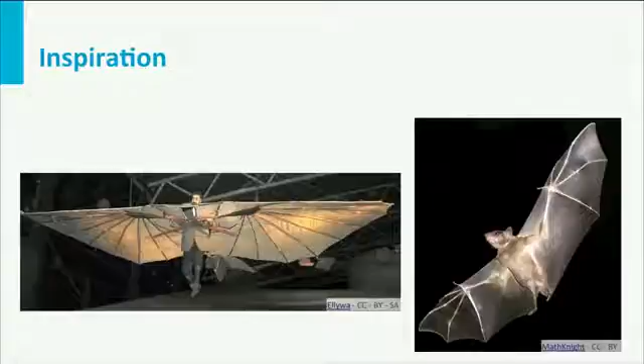In the picture on the left-hand side, you see one of his designs. On the right-hand side, you see a bat, and you can clearly see the resemblance of Lilienthal's design with the wing of the bat.

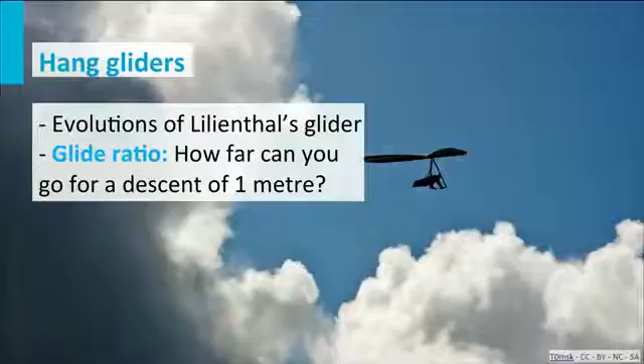Far descendants of Otto Lilienthal's gliders are today's hang gliders. These hang gliders fly from high ground and try to pick up some thermic to stay in the air as long as possible. What is a common glide ratio for a hang glider? Note that the glide ratio is the ratio of the horizontal distance for the descent of 1 meter. For common hang gliders, this might be 17:1, whereas for gliders with fixed wing, this might be 20:1.

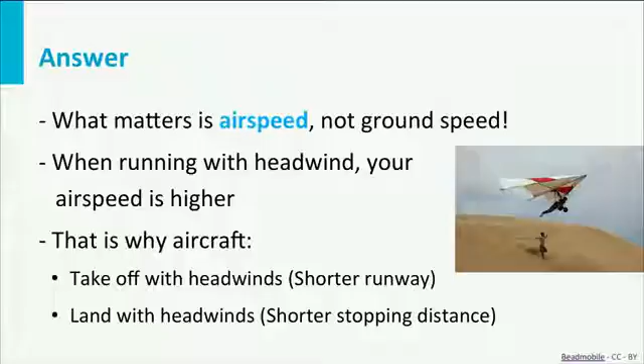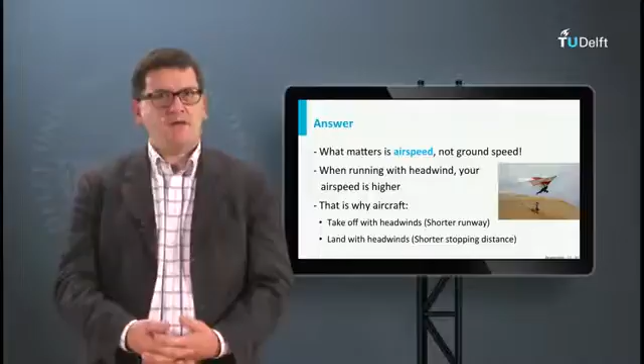Another question: gliders often run down a hill to generate speed. Do you think that the wind direction is of any influence? The answer is yes. What really matters is airspeed. So if we run downhill with a headwind, your airspeed is higher and you can generate more lift. That's also the reason why aircraft preferably take off or land with a headwind. In both cases, the required length of the airstrip is minimal.

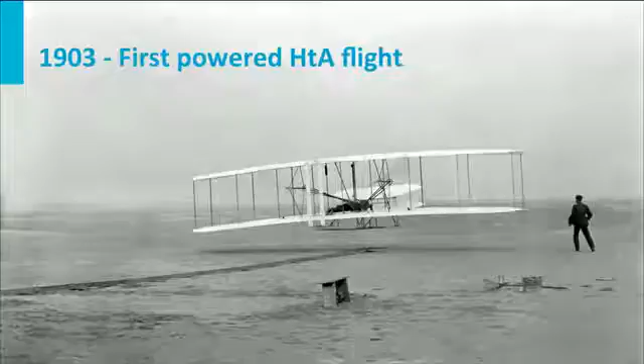Let's return to the pioneers of flight. The Wright brothers were the first people who flew their aircraft named the Flyer, a powered and controllable heavier-than-air vehicle. Although the flight was very short, the principle of flight was proven. In this short video, taken a few years later, an improved Wright Flyer is shown, which flew almost 1 hour with 2 persons on board.

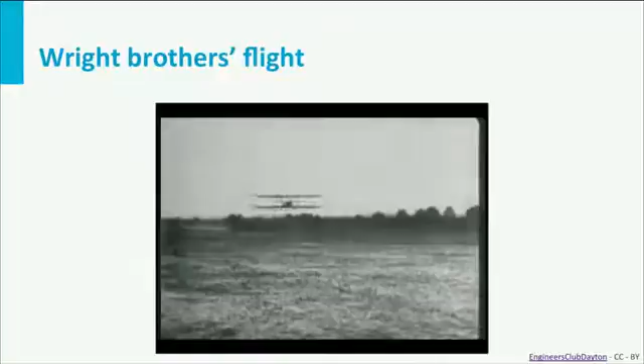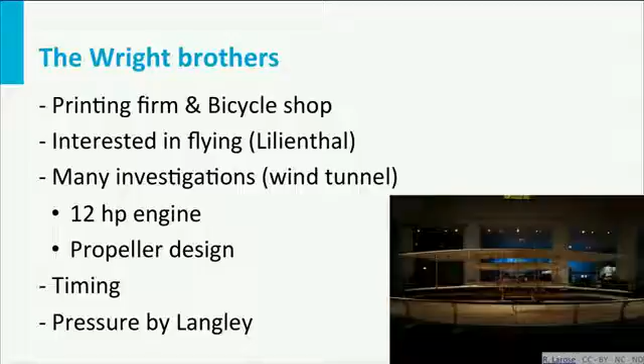The question may arise, why were the Wright brothers first? Well, they had a number of advantages over other pioneers. They had manufacturing capabilities in their printing firm and bicycle shop they owned. They also were very interested in flying, and they followed other pioneers in their attempts, like Otto Lilienthal. They also performed quite a lot of tests themselves on their engine, wing profiles and propeller. Next to that, there was pressure to speed up the process, and the time for flying had come.

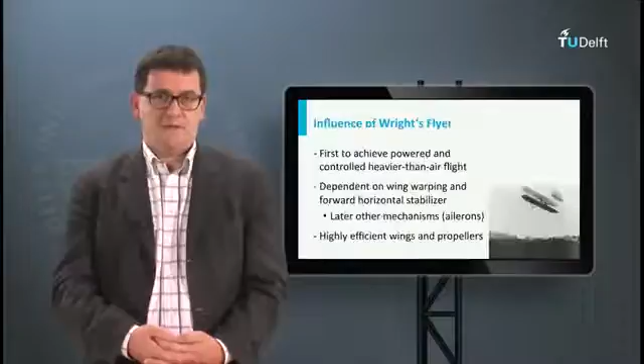If the Wright brothers had failed, probably another pioneer would have had the honor of the first flight shortly afterwards. The Wright Flyer was a very successful aircraft in those days.

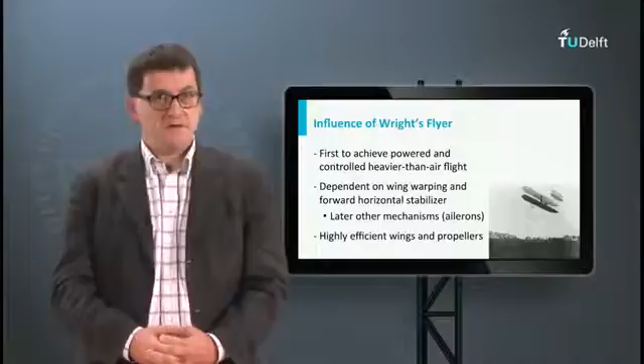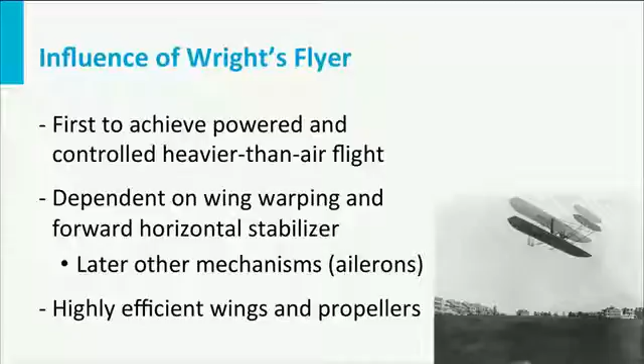Several upgrades of the Flyer were made, and on their European tour in 1908, they used the demonstrator aircraft we saw in the video, which was a derivative of their first Flyer. The Wright Flyer was the first heavier-than-air aircraft. It used wing warping and horizontal stabilizers in front of the aircraft to control the machine. Later, the warping, which is a local deformation of the wing, was replaced by moving wing parts like ailerons. Also, the wing and the propellers of the Flyer were very efficient compared to competitors.

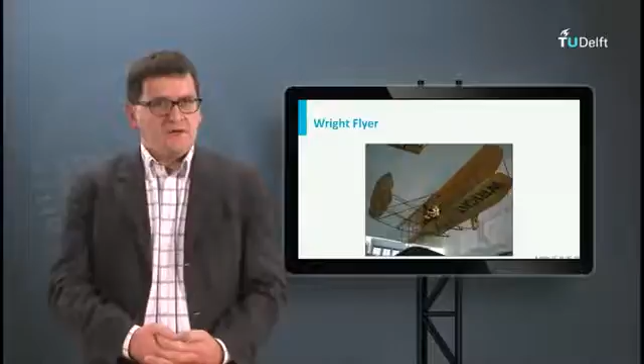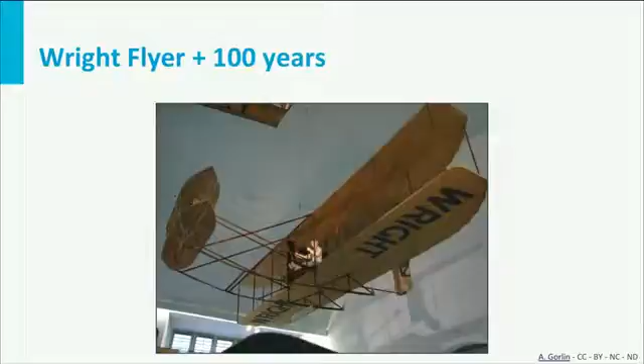The aircraft history, though still very short, has accomplished a lot since then. Look, for instance, at the differences between the Wright Flyer and a modern jet, in this case an Airbus A340.

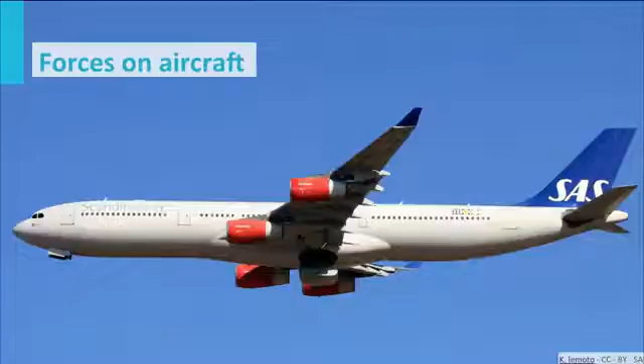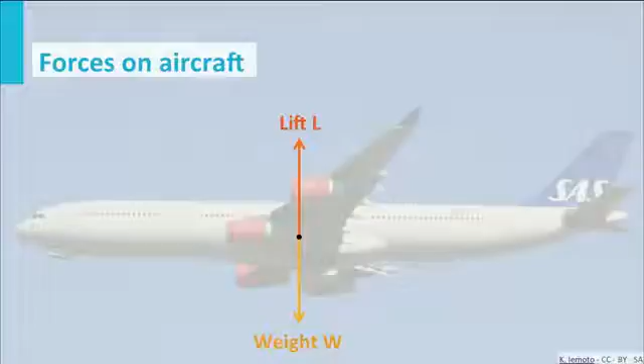Before ending this first lecture, I would like to introduce the main forces acting on an aircraft. If we assume a steady horizontal flight, we may distinguish four forces. First, the weight, the downward force representing the weight of the aircraft. Then the lift, which is generated to counteract the weight. Third, the drag, the resistant force that is experienced when moving through air. And finally, the thrust, needed to overcome the drag. When flying at constant speed and altitude, the equilibrium equations are simple: lift equals weight, and thrust equals drag.

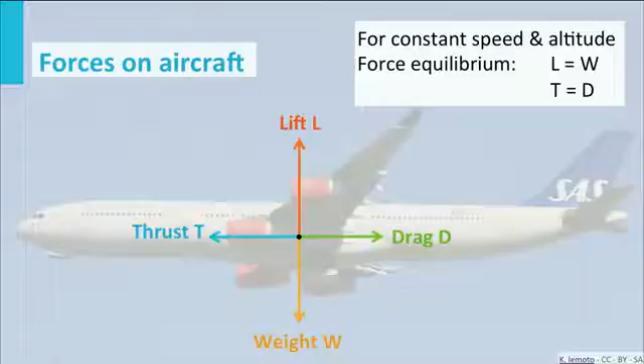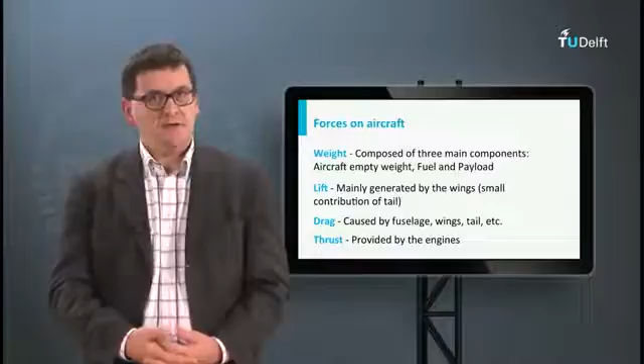When we look briefly at these forces, we can tell the weight of the aircraft includes the aircraft empty weight, the payload like passengers or cargo, and the weight of the fuel. The lift is generated by the wing, with a small contribution of the horizontal tailplane. The drag is caused by friction between the aircraft surfaces and the air, and by pressure differences around the aircraft. All aircraft parts contribute to this drag: the fuselage, the tail, etc. And finally, the thrust is provided by the engines.

In the next 3 lectures, we will discuss all these forces in more detail.